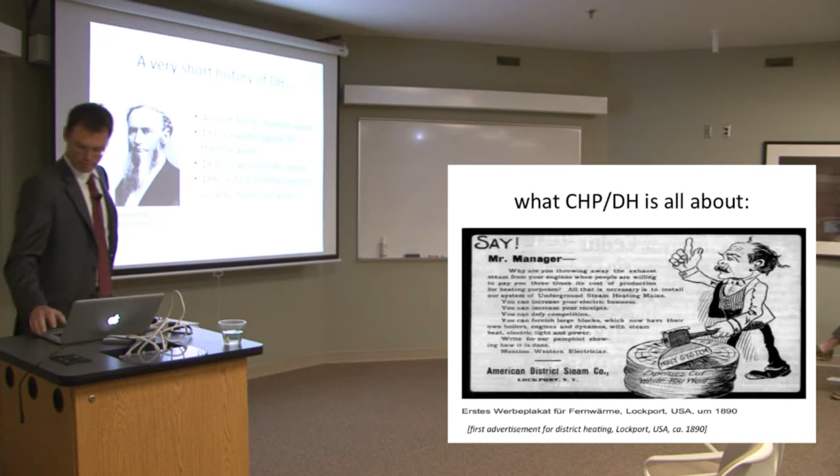This is an advertisement for the first district heating system of Mr. Holly, and it actually tells you what CHP district heating is all about. It's hard to read, but it says: Mr. Manager, why are you throwing away the exhaust steam from your engine when people are willing to pay you three times the cost of production for heating purposes? It goes on like that, telling you that you're about to use the steam for something anyhow, and there's steam left over after the process, so please use it. That tells you where the efficiency of the CHP process comes from.

This is a more elaborate way to say the same thing. You have 100% input from coal, gas, biomass, or something else that you burn, and how much energy do you get out of it? The degree of efficiency of CHP is superior to heat-only or electricity-only generation. A modern CCGT combined gas turbine gets up to 60-63% under perfect conditions, so if you put 100% primary energy in, 40% is lost. If you use hard coal or lignite, the losses are even higher. If you use a combined CHP unit, you take a little steam out of the turbine, so your electricity efficiency drops a bit, but the overall efficiency will be bigger than separate heat-only and electricity-only production. That's what the whole idea of CHP is about.

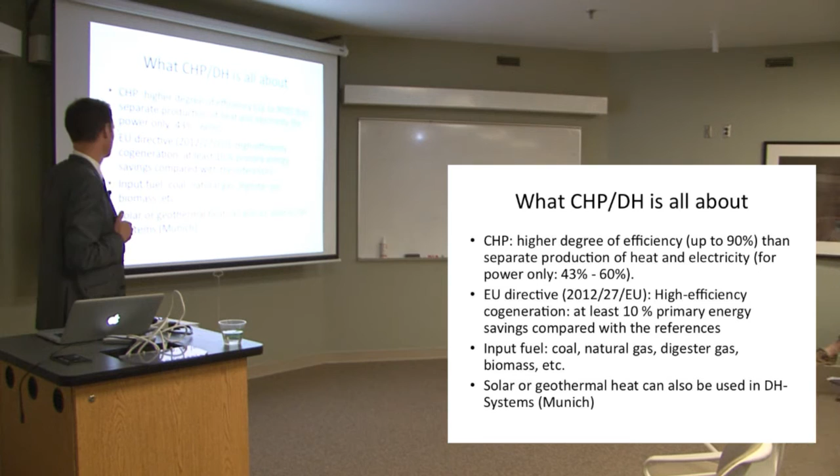There are different areas where CHP can be applied - three basic areas. The biggest one in Germany is the district heating sector, in the big, dense agglomerations: Berlin and Hamburg, which have the largest district heating networks; the Ruhr area, where I'm native from - Essen, Dortmund, Bochum - with 6 million people living there; Mannheim, an area close to Frankfurt with a lot of industry and people; and Munich, not quite as big, but in the south it's a bit harder. There you have these large district heating networks.

The second application field for CHP is industry. It's completely different there - a different pattern of running a CHP unit in industry. It's chemical industry, paper mills. In Germany, it's partly car manufacturing, but mostly paper and chemical industry.

The third area is a little more diverse. We have heating for individual houses, for some blocks, for new-build blocks for example. It might make sense for a small, growing community with a greenfield investment to ask how to get an efficient heating system for their houses - so you might set up a CHP unit there with a small district heating network, a bit different from the big municipality-owned systems. Then in services, CHP is used very often - supermarkets with cooling needs can use CHP for both heating and cooling.

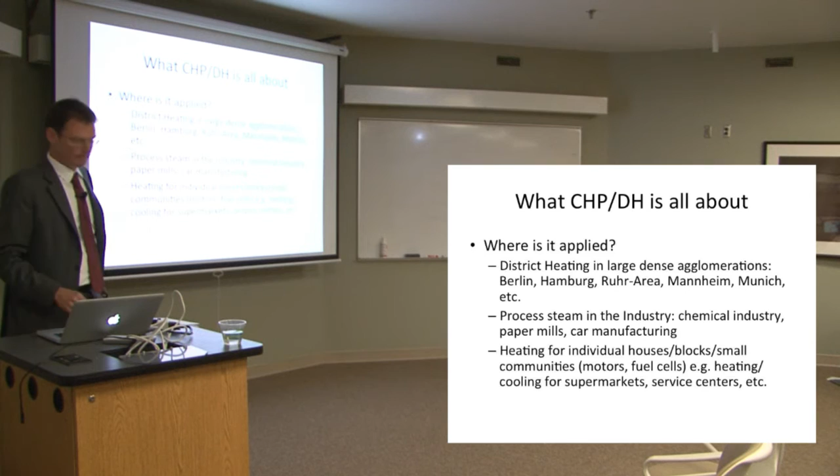State of play in Germany: 16%, which is roughly 100 terawatt hours of the net electricity production in Germany, comes from CHP units, that was last year. The share of district heating in the heating market is about 13%. So you see it's not terribly big, and it's a thing that politics are concerned about and are working on.

It saves up to more than 50 million tons of CO2, which is one thing for good, but it's also important to notice that it is a way to get other emissions out of the city centers. Historically you had coal firing in individual houses, which produced a lot of ashes and dirt, and you wanted to get them out of there. So you produced a district heating network and had just one plant at a certain distance from the cities where all this was produced.

In Germany, the fuel that is mostly used for CHP is gas, in district heating and industry. We have a share of 20% produced by coal, 15% hard coal and 5% lignite. Usually these are large, classical 1 gigawatt power plants where they take a little bit of the steam and use it for district heating systems. It's not really so important.

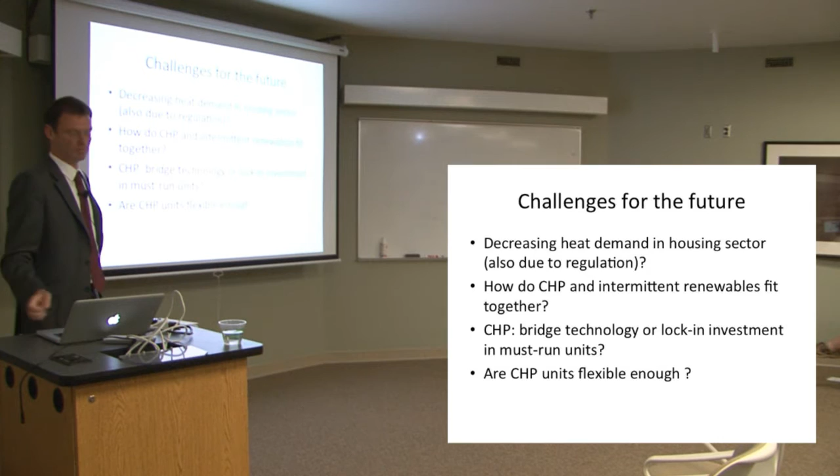So a little bit of background. Germany, as you know, started a very ambitious process, not only after Fukushima, it actually started much before that, but after Fukushima it gained such momentum, such speed, that it is really changing the power system completely. These are some of our goals. The goal for 2020 is a share of 35% renewables in the power system. Last fall we were above 32%. You might have heard it.

A couple of weeks ago, it was a sunny Sunday with no industry in the grid, very low load, the sun was high, a lot of wind in the North Sea, and we covered above 90% in the grid. So grid stability was kept. We always have to say this is Himmelfahrt. It was a holiday, so there was basically no industry in the grid, the load was very low, and so it's easy to get up to that 90%. But for the TSOs, this is a big day because they know it's happening every year on that day. Himmelfahrt, you might look that word up later on.

It's usually very sunny, and that day it was very windy at the coast, so we had a lot of renewable energy in the system, which is an extreme situation. Let's not be kidding about that. For TSOs, this is really a challenge to cope with. These are technical issues, but they have to be taken care of.

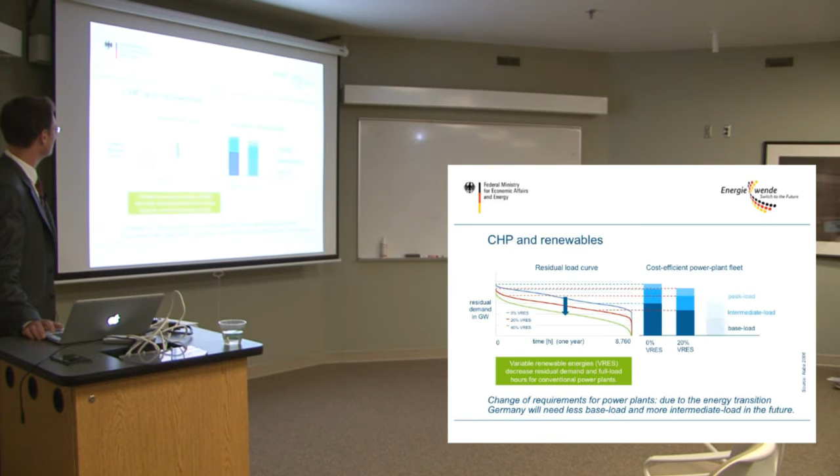I'm going to skip this, it just shows you the same thing in different words. And this is what we did. We were asked: you want to give public money to CHP power plants because you believe they are flexible, efficient, and save CO2. But please prove to us that you don't push out renewables. So we asked our researchers: how many renewables are on the grid when a standard CHP unit is running?

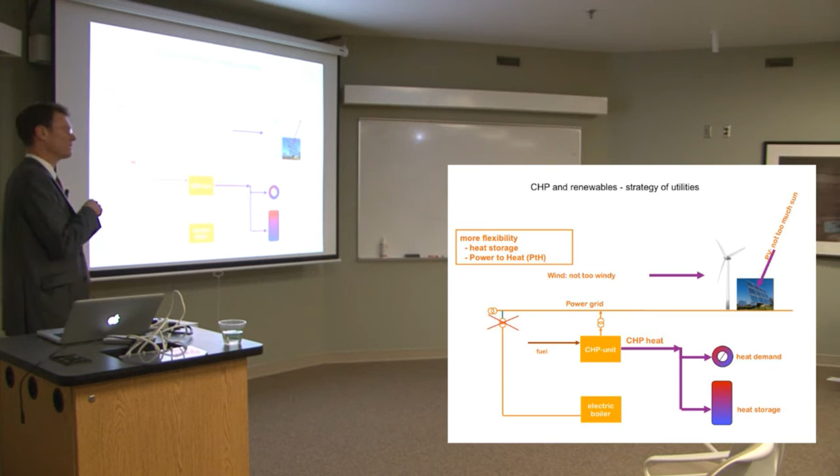They say with these two elements, heat storage and an electric boiler, we can cope with flexibility and intermittent renewables. In the base case for the future approach, the CHP unit is not only feeding the demand of customers, but also storing a little heat in a heat storage system. Heat storage is nothing else than a big, very well insulated cup. They have been built in past years by the big municipalities, not in large numbers, but this is actually happening. They're using that, and I'm going to explain why.

Okay, so now you have lots of sun and lots of wind, and so the grid, how does this go on here?

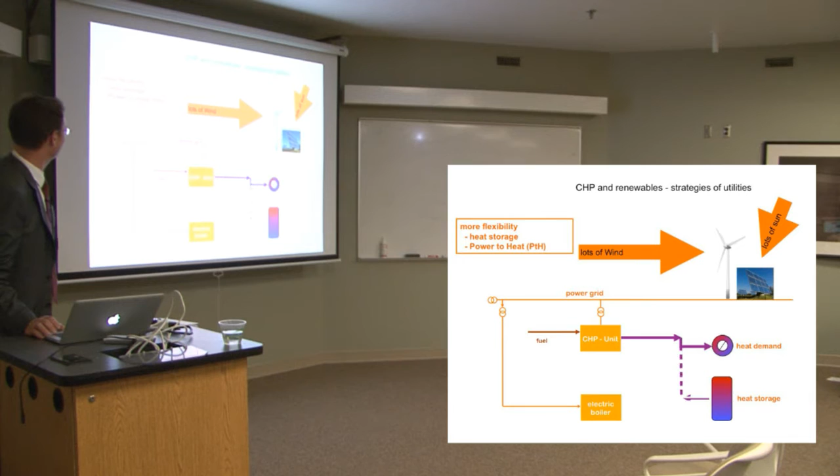Okay. Okay, this is a full picture. So if there's a lot of renewables feeding electricity into the grid, the grid is a little bit blocked. The CHP unit is not supposed to feed so much electricity in there because it is likely to push out renewable energy.

Now, at the same time, the CHP unit always has to take care of their heat customers, because they are not supposed to sit in cold, dark rooms. So they use a heat storage system and feed it to their customers.

If there is even a surplus of renewable energy in the grid, that can be used to heat up water, which actually for technicians, for engineers, is a terrible thing to do because electricity is the highest form of energy. If you use it to heat up water, it's not efficient, but it is surplus energy, which would have been thrown away otherwise. That is one idea that is really advocated by the utilities now. They say the keyword is power to heat.

Use this surplus renewable energy, use an electric boiler and actually put it in the heat storage system, and heat can be stored for a longer time. It's different than electricity, which has to be converted into something and reconverted. So we are able to cope with the situation with a lot of renewables in the grid by using electric boilers and heat storage systems.

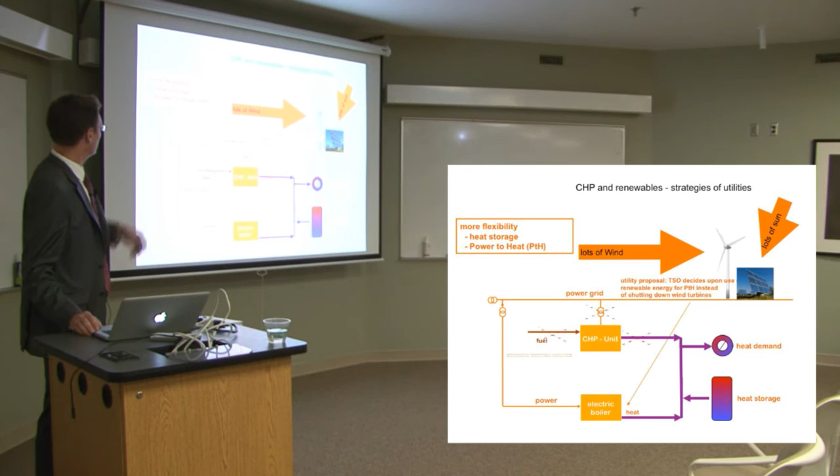Okay, there were more fancy stuff in there. Yeah, there are even more strategies for the utilities, but which are not so important and are more on the research and development side, but it is deployed in some parts. Some of the municipalities use heat pumps at a larger scale. Some, as I said, Munich is using geothermal heat.

I didn't find a good picture for solar thermal panels on rooftop, for example, but also on garbage dumps, on sites like that. Problem with solar thermal is Germany does not have very much sun in the first place. Second is you need a lot of space, and the space is used rather for photovoltaic electric systems than for solar thermal, which are more expensive. But there are some pilot projects in that.

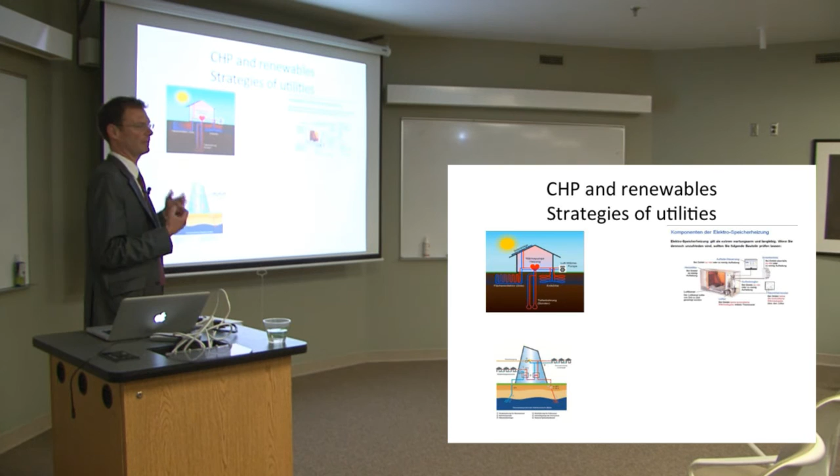Okay, I hurry up. So just a brief overlook on CHP policy. We have different measures in place to ensure that new houses and modernized houses have a certain level. CHP can be used to attain these standards there. We have a Renewable Heat Act, which obliges the owners of new houses to use as much renewable heat as they can. But there's an exemption for CHP, because that also helps to deploy more CHP, because CHP is regarded as the most efficient heating system.

We have the Renewable Energy Act, the famous EEG. There's a feed-in tariff which also used to contain a feed-in tariff for CHP using biomass as a fuel, which has been cut down very, very strongly 2 years ago because it was so expensive. It's now under discussion again.

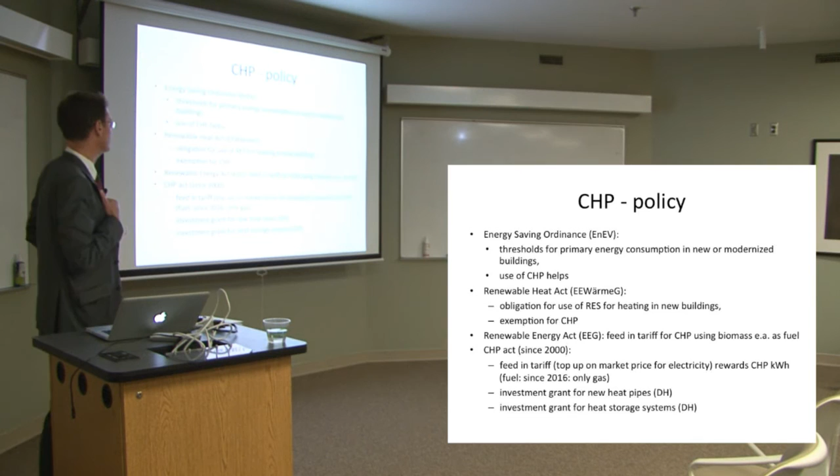And then we have the CHP Act, which is the most important act. It's a feed-in tariff. It's a top-up on the market price. So the operator gets the market price, and we will pay him for every generated kilowatt hour a top-up of, it used to be, 1.8 cent per kilowatt hour for a limited time over 30,000 operating hours, and after that it's a full stop. We added new elements which are investment grants, a classical investment grant, 30% of the investment sum for new heat pipes, and a new element which supports flexibility: investment grants for heat storage systems.

Last year we had this big discussion, as I said, and actually CHP was regarded as one tool for how we can obtain our very ambitious national goals. And we came up with a compromise, actually. The Parliament agreed to boost the budget for support from 750 million a year to 1.5 billion a year, which is pretty good. But they said you have to focus it more on flexibility, and that goes along with a focus on public CHP and district heating.

We introduced a surcharge for existing gas. Usually the deal was you build a new CHP power plant and you get this support for 30,000 operating hours, and after that you're off to the market. You have to take care of it yourself. And now we took in again gas-powered CHP power plants, because the decline in electricity market prices was so hard that their business cases were ailing.

And in Germany, 7-8 years ago, a lot of municipalities had invested in high standard CCGT combined heat and power plants, and the business cases were very bad. So they put a lot of pressure on getting these already existing power plants into the feed-in tariff again, and the compromise was we get them on board for 4 years. They don't get the full premium, not 30,000 operating hours, but just 16,000, I think, at the end. And we believe that in 4 years the market will look different, and then we see again. And we got a lot of other elements in there.